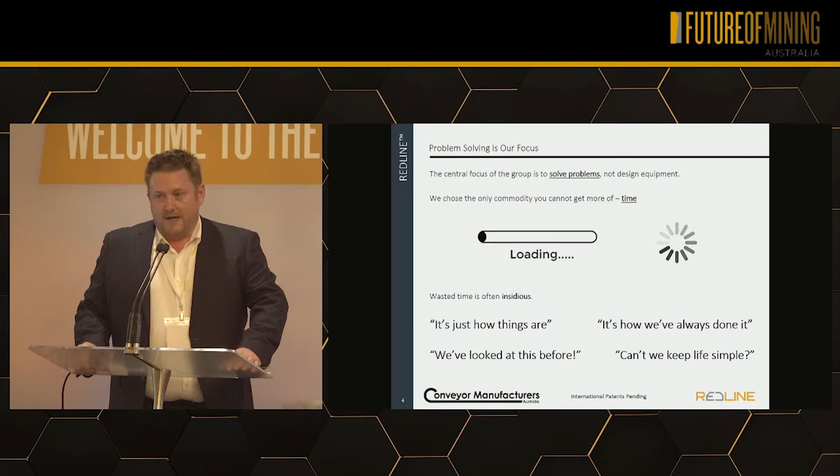My past, I started as a coal miner underground and worked my way out of the mine, so to speak, became a mine manager and whatever. These were some of the sentences we used to get all the time: oh, I've always done it this way, or can't we just keep life simple? Why do you want to have to unpack everything all the time? My mining nickname is Sparrow, probably because I flit around with too much energy, not achieving too much, but it's certainly frustrating.

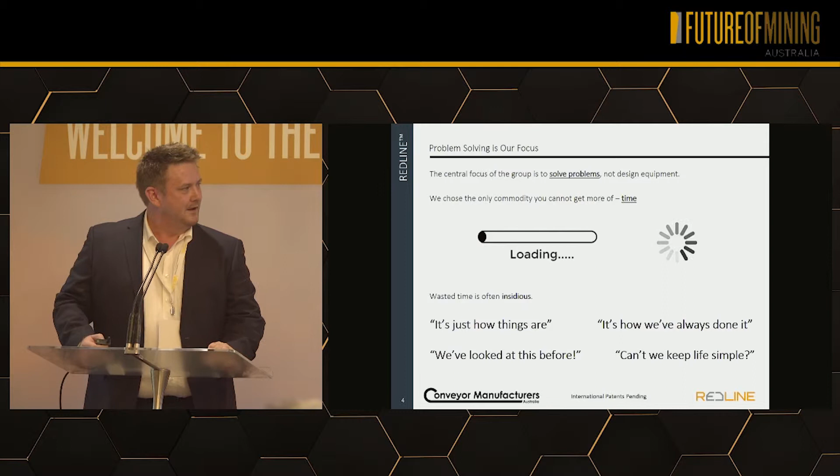So the first area, and my background's predominantly underground, was a typical underground coal mine. When I sat and looked at it, we take the most amount of jobs, the most amount of people, the highest risk activities, the most amount of mobile and diesel equipment, and we stick it in the most congested part of the pit, and we expect it to perform. And when it doesn't, we all sit together the next day and scratch our heads and look at each other and go, okay, we'll do it better next time. But we do it every time as if it's the first time we've ever done it, and it doesn't improve. And you come to conferences like this, and we talk about the same sort of stuff.

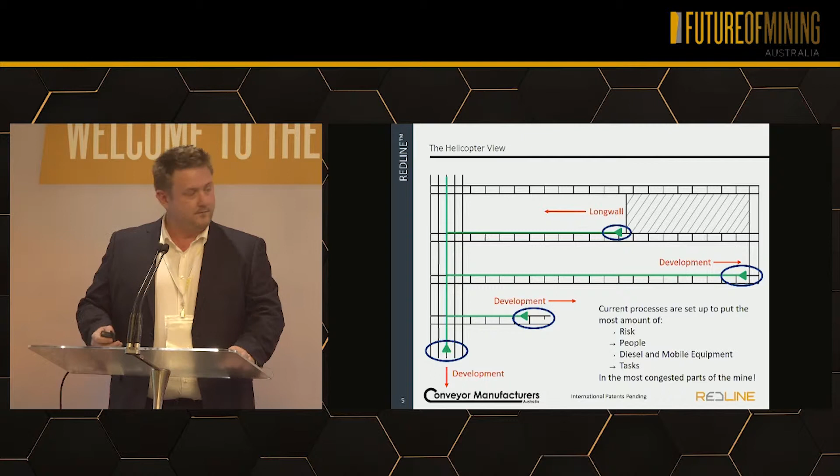So we decided to look at it from a process point of view, not from an equipment point of view. Process isn't nearly as sexy or exciting as looking at new equipment. So basically what we did is we took as many of those tasks and jobs that are typically done at the inbye end, and we moved them out. So the guys and girls at the face, they are there to cut coal, and that's it. All of those other jobs, wherever possible, get taken out and divorced from the process.

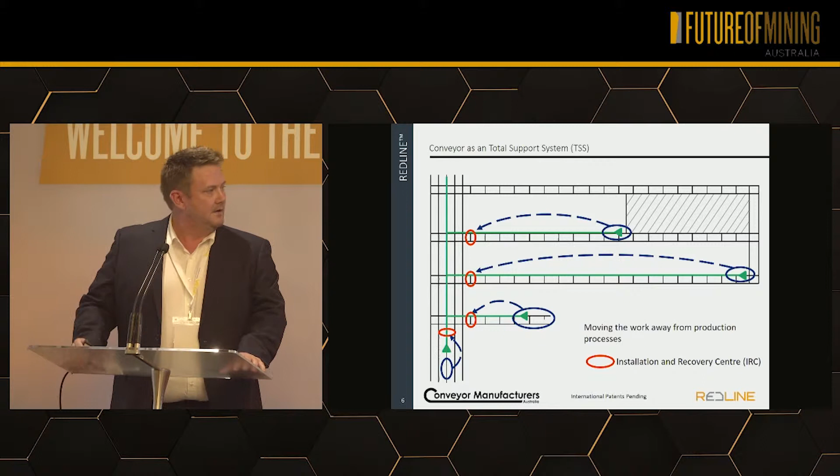This was a mine that I was loosely associated with, thank God I wasn't the manager, but that's how they managed their conveyor structure. It came out from underground, was tipped in a pile, guys at $70 an hour on overtime spent all shift sorting through it, and they paid a contractor $3 million a year to drive out from town to pick it up, fix it, straighten it, clean it, and send it back to the pit.

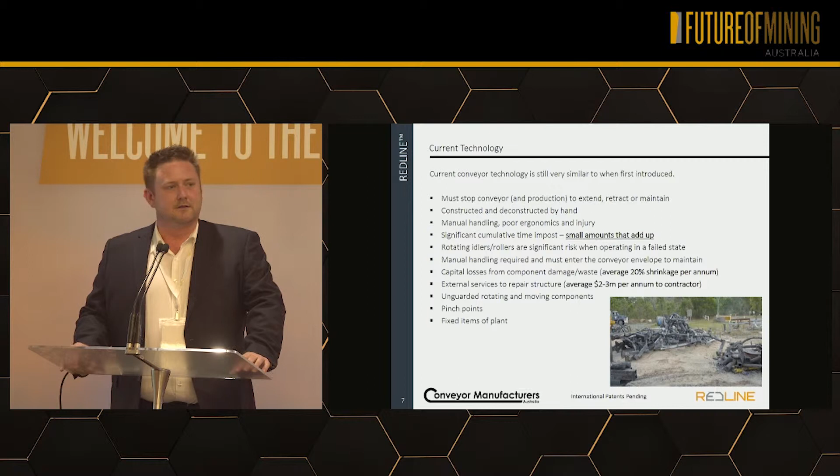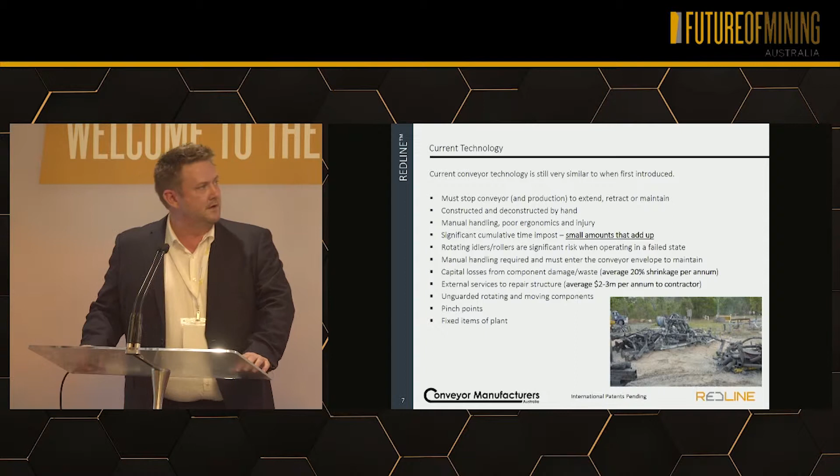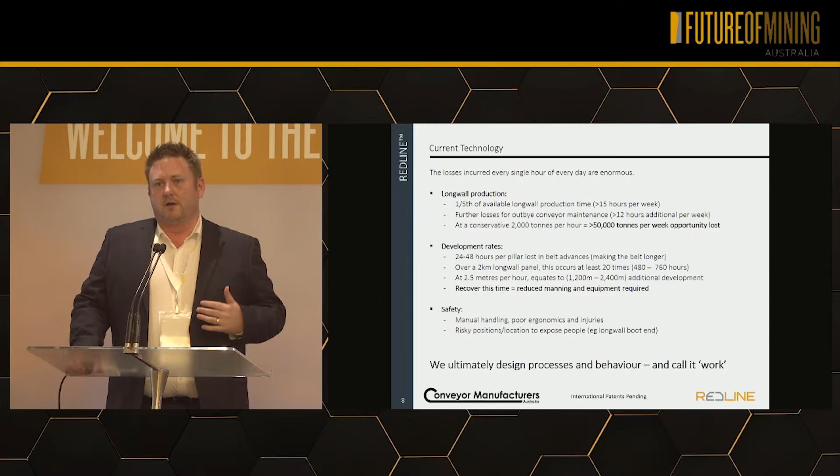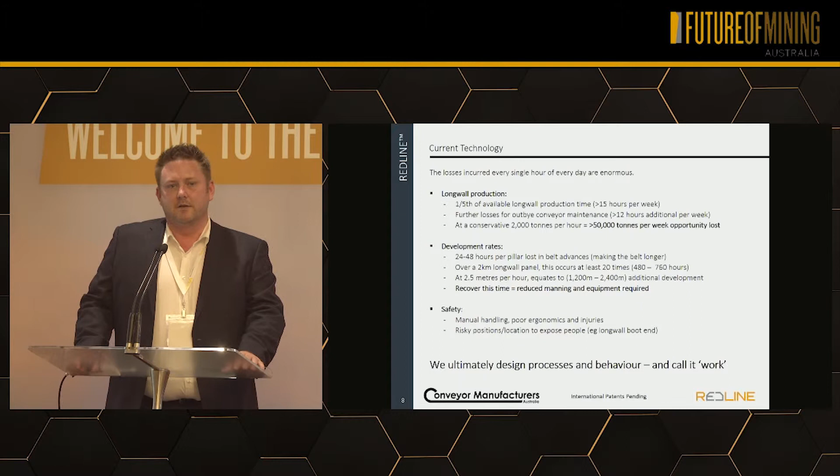Ultimately, conveyors, the bit of equipment we chose, have not really changed forever. It's still a big rubber band rolling along on idlers. So we decided to do something about that, and certainly in an underground mine, and in a different set of circumstances for an open cut, there is a hell of a lot of lost time. We tend to look at the major delays that we report, but it's a little bit like an iceberg. There's a whole lot of inefficiency built into our processes that we don't measure. We just accept that, well, that's mining and that's just part of it. So there's this artificial glass ceiling we've imposed on ourselves, and we're trying to break that.

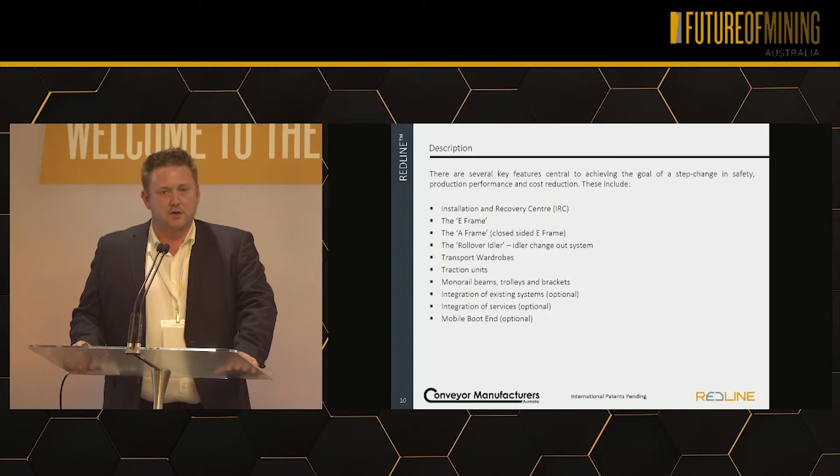So Redline is our first system, I guess, in solving this. There are some major components to it, but essentially it is like a normal underground conveyor, so a mine doesn't have to go and repurpose their whole operation. They can use a lot of what they already have, but there's some IP in some of the components we've designed.

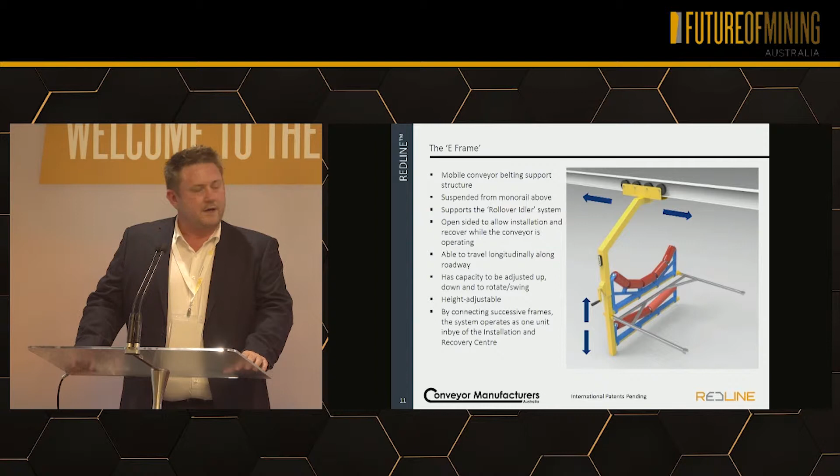Essentially, rather than the conveyor being a fixed bit of equipment that's either hung from the roadway roof or mounted on the floor, it drives along a monorail that's hung from the roof. And by that, and multiples of them together, the system can drive along the monorail and operate as one continuous conveyor. So rather than having to extend it and make it longer or shorter, which is a normal part of the mining process at the in-by end, which ultimately stops production, we can do that from the out-by end without stopping production. So all of that time is brought back.

There's a hell of a lot of manual handling and other safety and cost benefits as well, but really the extra production time is the big one.

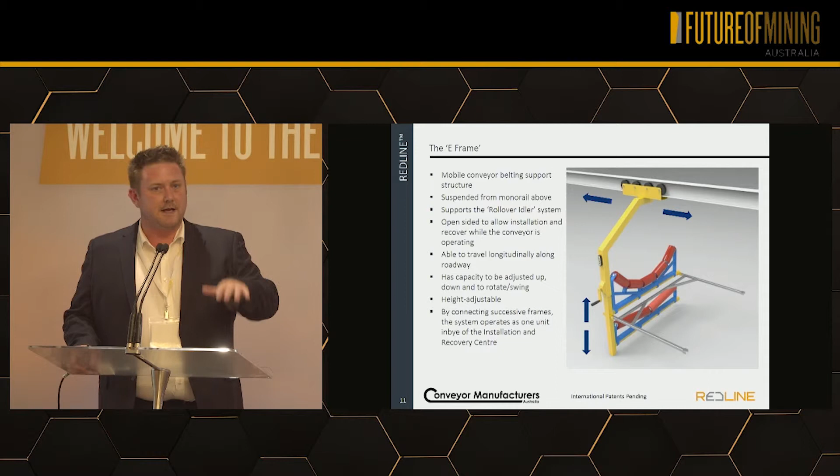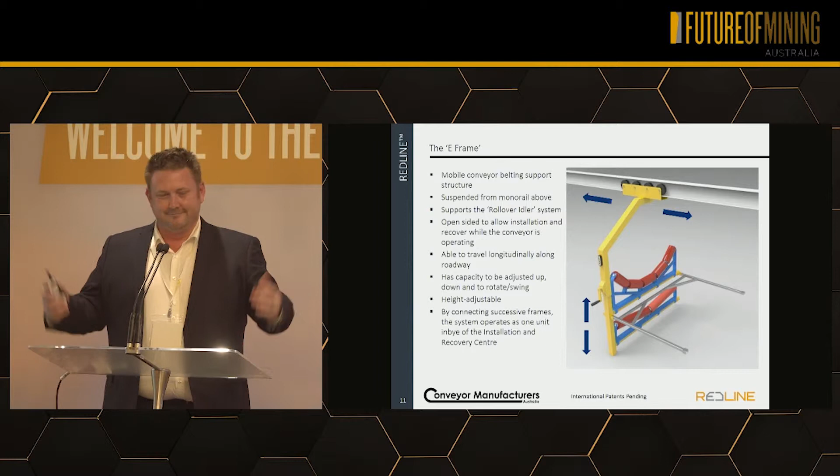There's a height adjustment mechanism, so you can grade the belt up and down. They say the simple ideas are often the best. The height adjustment mechanism isn't too dissimilar from a Hills hoist, the clothesline. We were living here in Sydney and I was teaching the kids to swing around on the line, and I fell against the handle, and yeah, that was the solution. Simple, but it works.

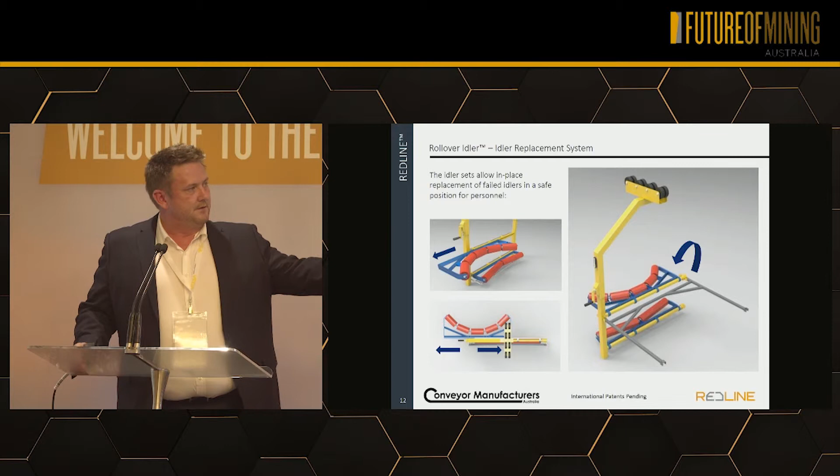The rollover idler is a second bit of equipment we've come up with, and this allows idlers to be changed on a conveyor without having to stop it. It's not just for underground conveyors, but any surface conveyor in any other industry. Rather than reaching into the conveyor to lift the belt off a failed idler, the idea is that the idler comes away from the conveyor while the conveyor stays as it is, and it's replaced from the safety of a walkway.

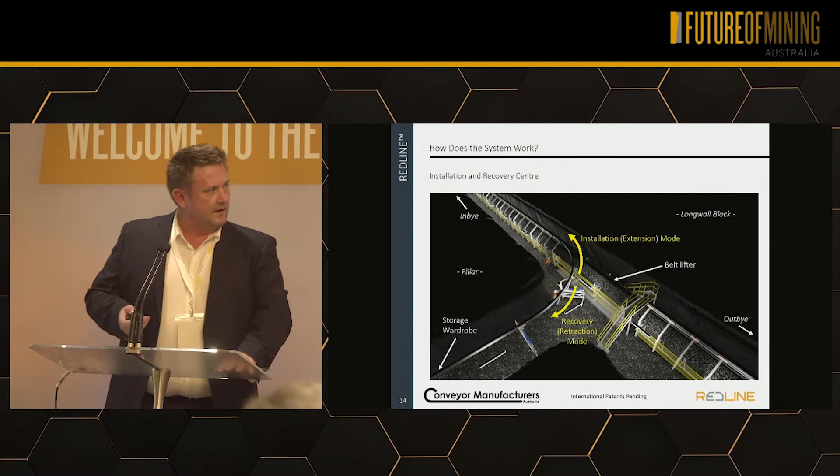This is an image of the installation recovery centre where we make the conveyor longer and shorter. This is outbye of the panel, away from the production area. From that point, the conveyor drives along that monorail and operates as a full, complete system, and the reverse happens during production when the conveyor is coming back out.

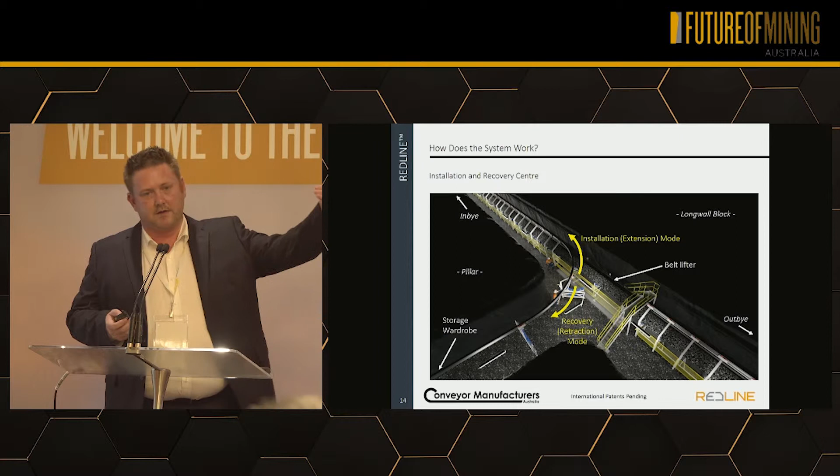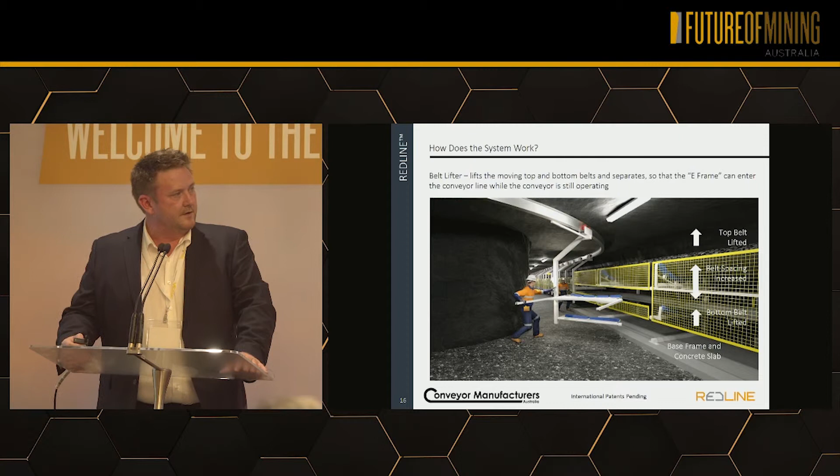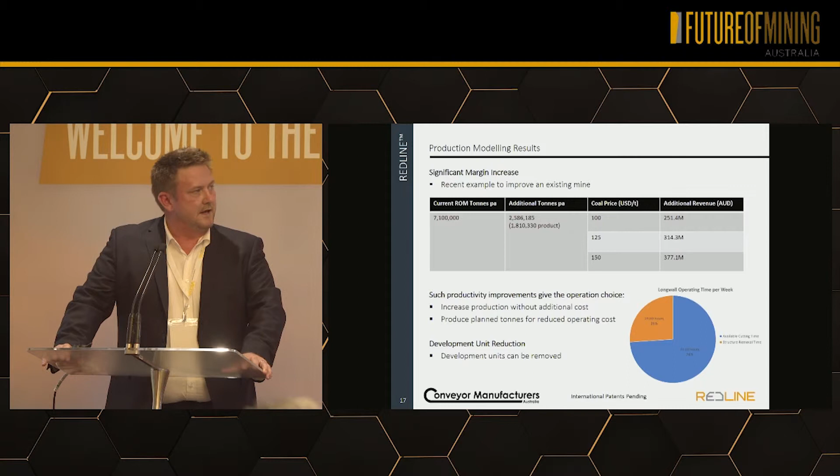In terms of the impact for a company, it's pretty significant. We ran a model last week for a client we're discussing with, and on their operation they expect to cut about 25% more coal a year without any extra expense. That's a significant amount of money. At the moment, coal price depending on the product can be several hundred million dollars a year, so needless to say, they're fairly interested. Or in the other part of the cycle where prices aren't as high, you can reduce costs.

Our other system is a container conveyor. This is more aimed at surface power generation, ports, open cut mines, that sort of thing, and certainly not just coal. The container conveyor is really designed to fix the problem of fixed infrastructure.

At the moment, conveyors are regarded as fixed assets. Once they're in place, they're there - they're concreted into the ground, built by hand. You can't really recover them, and if you do, they're not worth much, and they cost a hell of a lot of money to move. In New South Wales, regulators now make you fully rehabilitate the prior site, so you can't just bury them like we used to. They've got to be physically taken away and disposed of.

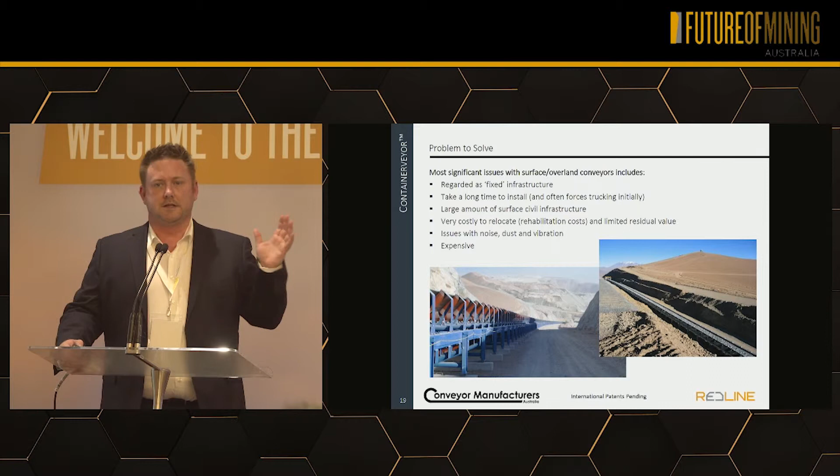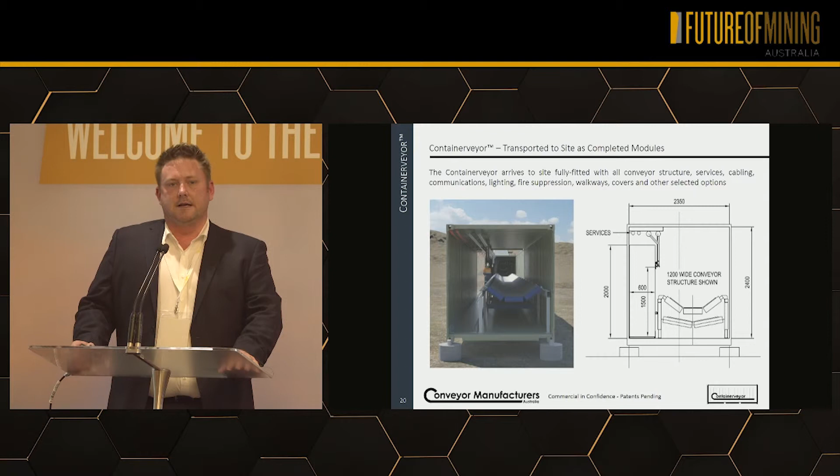So how do we do it? It's the humble shipping container. The shipping container is fitted out with the conveyor at our manufacturing facility, and it arrives to site in a plug-and-play format. Any options you choose - pipes, cables, lighting, fire suppression, walkways - are all fitted out prior to arriving at site. It is a registered shipping container, transported to site as a shipping container, and then becomes its operational framework.

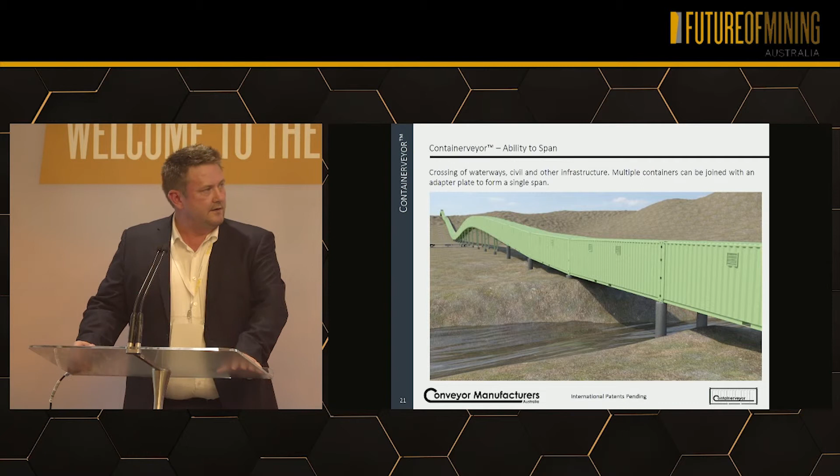We can span up to two modules at the moment, so 80 feet between foundations, perfect for gantries and that sort of thing. We're working on a major international airport at the moment with this system, and it had to be fully enclosed because they're transporting fly ash and cement powder. This is essentially a view of the system they're looking at obtaining.

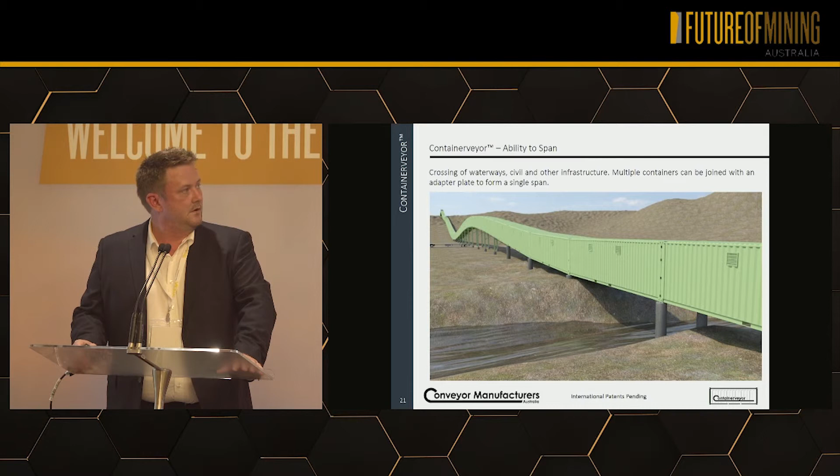The sides of the container are able to fold out if you want, to provide an external walkway, which can be fully covered.

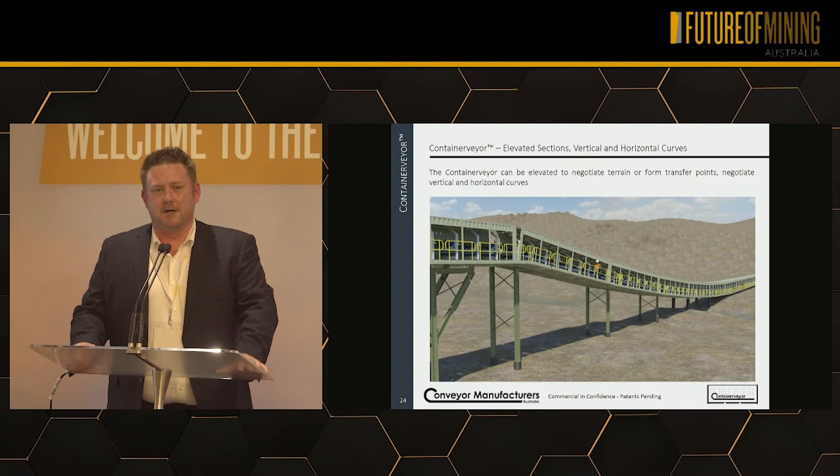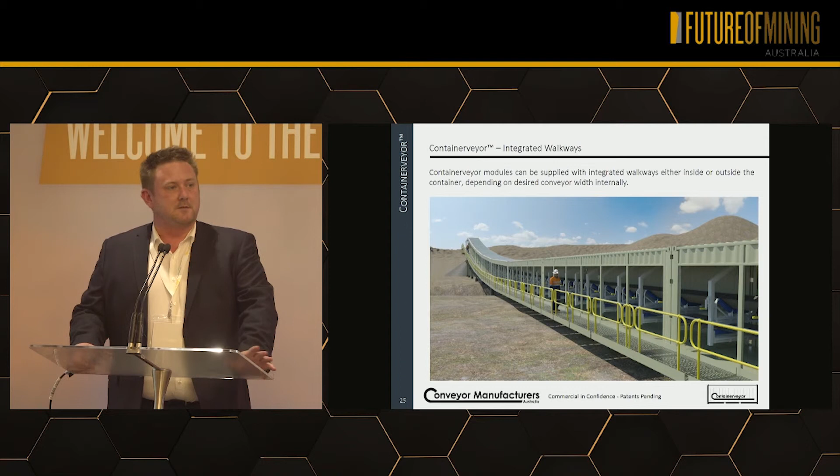Very, very simple - there's no rocket science in any of it. There's a hell of a lot of engineering in it, but nothing tricky about it. Again, it's trying to address those fundamentals of time. The time to install an overland conveyor is usually fairly significant, and operators will want to truck product or material while the conveyor is being built, because it takes so long and usually costs a hell of a lot. These being modular, you can pick them up and reuse them very inexpensively.

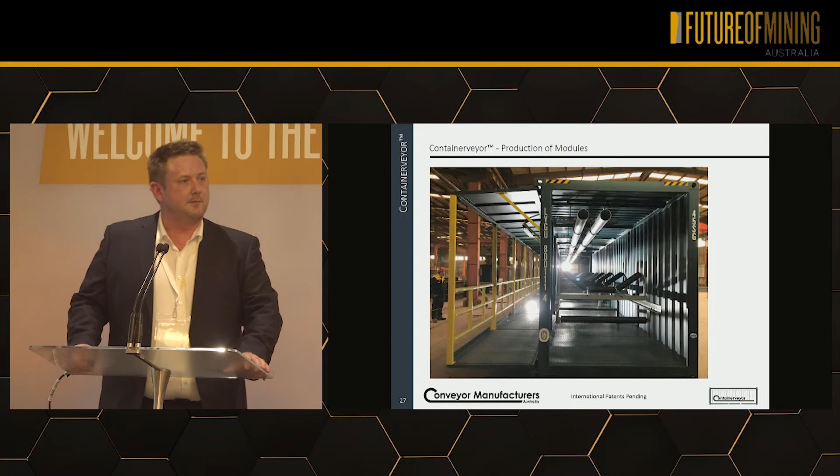That's me. Any questions?

Yeah, sure. Really enjoyed your presentation. Thank you.

The Containerveyor seems to me, after you put the modules together, putting the conveyor together is more work than the traditional way? No, it's the same - it's just pulled along, you do it from one end to the other. Just a winch, is that how it's installed normally? Yeah, yeah. Our other version - every module is its own conveyor system, so you could go around right angles or up steep gradients or around an obstacle or whatever.

So like a cascading system - this design will make it easy to move it from one location to another. Absolutely, yeah, absolutely. There's an operation in WA we're talking about - they buy a new conveyor every two years because their pit moves so fast, and because they're not worth anything to recover. With this, they will only have to buy two for the rest of their life of mine, and they just leapfrog them.

One more question - I know conveyors are known for safety concerns, and the part you showed in the underground mine where you can continue operating, it worries me that it's going to be some safety concern. The whole point is that you can do it away from the conveyor. Some companies will choose not to touch a moving conveyor at all, no problem. But even so, with that system, the time taken to replace a failed component, or even just wind it away from the belt so it's not going to cause any damage, is a significant improvement from now.